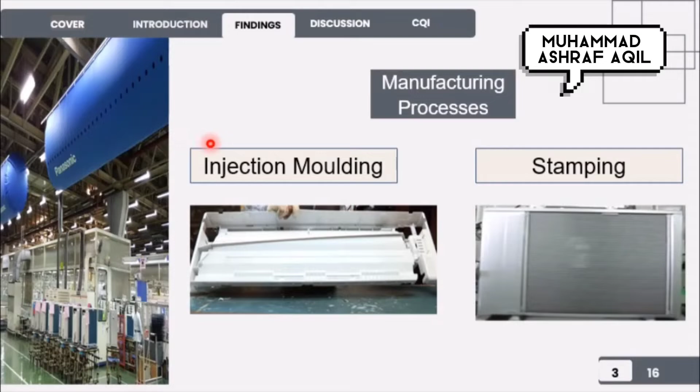Okay, my name is Aqil bin Saisfaizal. Today I'm going to share our findings on how Panasonic manufactures an aircon. There are some manufacturing processes that apply to produce an aircon.

The first process is injection molding. Injection molding is a process of melting plastic pellets that, once malleable enough, are injected at pressure into a mold cavity which fills and solidifies to produce the final product. They use injection molding to produce the housing for the aircon.

The second process they apply is the stamping process. Stamping is the process of forming a flat sheet metal where a tool and die surface forms the metal into a final shape. They use this basically to produce the casing for the fan, which is normally located outside the house.

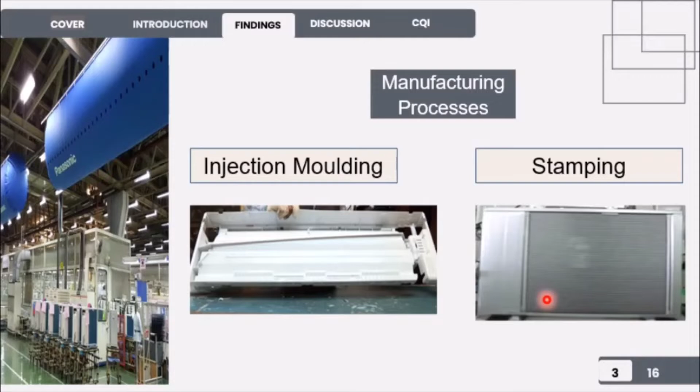Next, the bending process is also included in the manufacturing process. Bending is used to produce a shape with any angle in ductile materials. In Panasonic, they use bending for the sheet metal casing of the outdoor fan unit and the tubing, which is for the condenser and evaporator of the aircon.

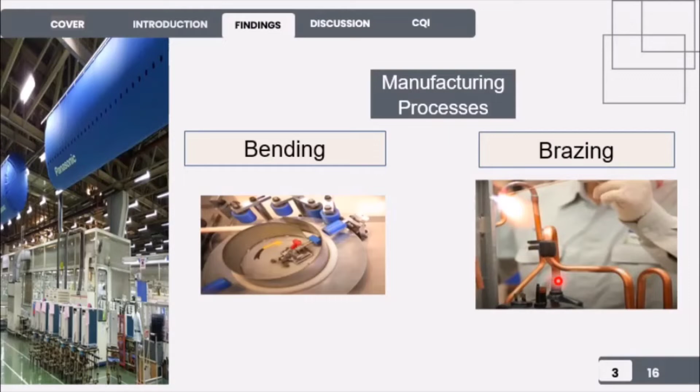Other than that, they use the brazing process to connect the internal parts of an aircon, such as the pipeline, which is made from copper. The final step is the assembly process, where all the parts of an aircon are assembled in the assembly production line in Panasonic.

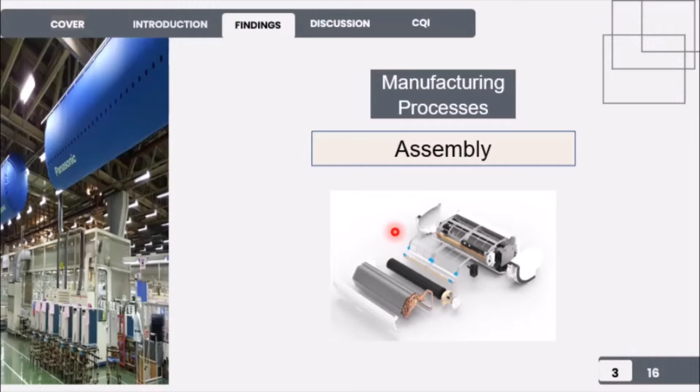Next, there are some technologies or machines provided in Panasonic to ease the process. First, they have a plastic injection molding machine for the injection molding process. Next, they also have a stamping machine to produce the casing of the fan. Then they also have a gigantic bending machine, because they need to bend large parts, as I explained in the manufacturing process.

They also have some technology used to make inspections and quality control, to check whether the product is in good condition. As shown in the figure, they use sound technology to test the sound of the fan.

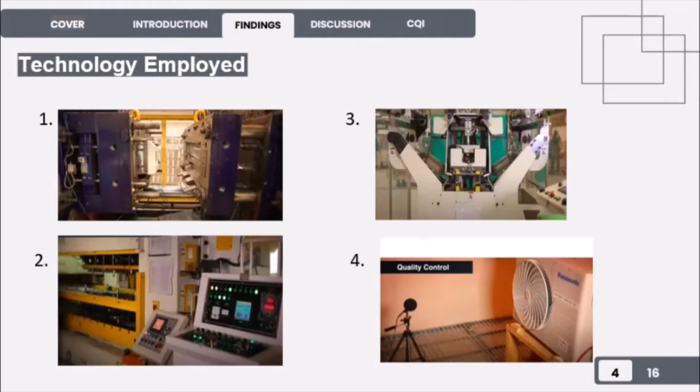Next, I will share about the design concept. As we can see in this figure, these are the normal dimensions that Panasonic uses to manufacture the aircon. All the dimensions are already set before Panasonic starts to manufacture it.

As we can see, the height of the aircon is set at about 184 mm, the length of the aircon is set at about 870 mm, and the thickness from the side view is set at about 204 mm. This figure also includes the dimensions for the internal parts, such as the left piping hole and the right piping hole.

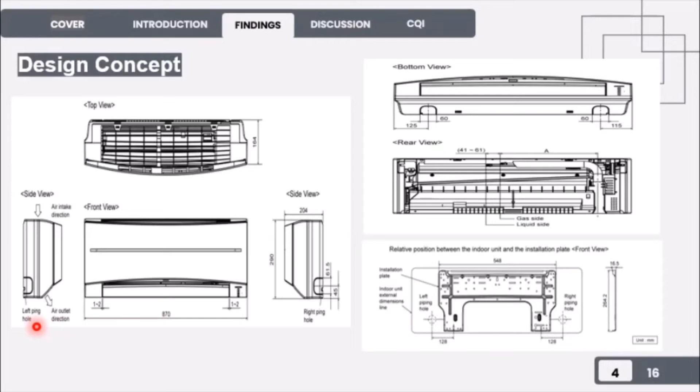Thank you. Assalamualaikum, my name is Muhammad Ahnaf bin Khalid, and I will be presenting the part of the findings on quality assurance, product produced, and problems faced. First up is the quality assurance.

What is quality assurance? It is a process of identifying that the manufactured product meets the standards and is fit to be used. Panasonic Malaysia has a strict guideline that needs to be used on every product they manufacture.

First up is the long-term durability test, in which they conduct an accelerated test for 10,000 hours of continuous operation of its products. This results in determining its reliability for use.

Next is the compressor reliability test. In this test, the compressor that has been used for other testing is disassembled and examined thoroughly to identify any failure and its reliability, as the test functions to determine whether the lubricant is sufficient for the part.

The third is the electromagnetic compatibility test. It is used to make sure that waves produced from the parts do not interrupt other appliances, as it also needs to satisfy the compliance standards set by each country.

Lastly is the waterproof test, which is conducted on the outdoor unit to make sure it can withstand the outdoor environment such as rain, dust, and much more. Here is the video of Panasonic conducting the test.

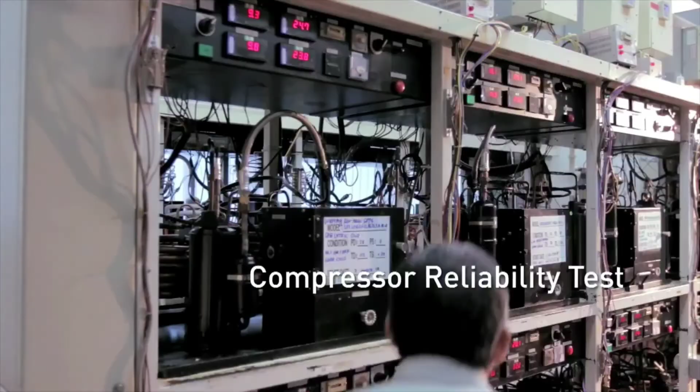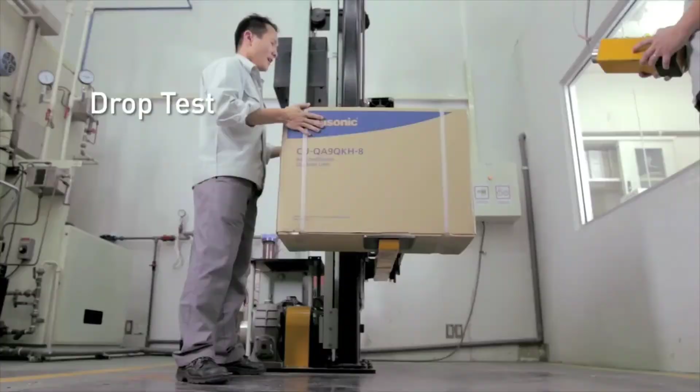Next part is the parts produced. First is the body casing for the indoor unit, produced using the injection molding machine. Second is the pipes connected to the radiator using a brazing joint. Third is the outdoor unit, whose casing is made by the stamping process. Fourth is the heat exchanger part, produced using stamping and brazing. Finally, number five is the pipe used to transfer heat from the indoor unit to the outdoor unit, which uses the bending process.

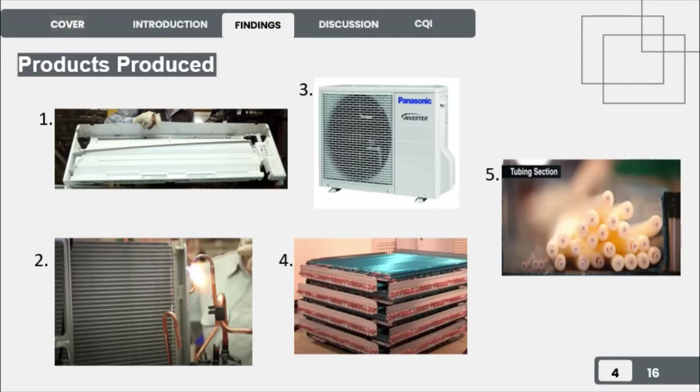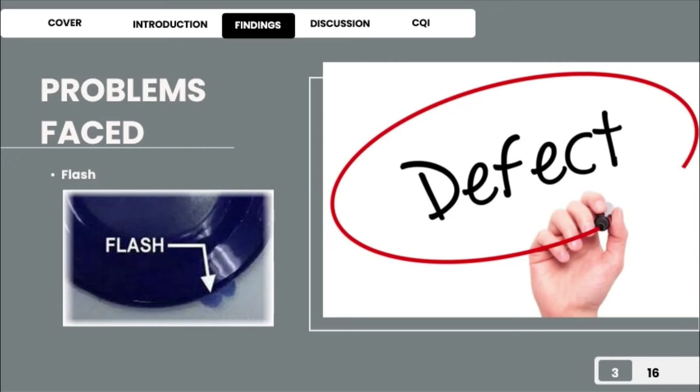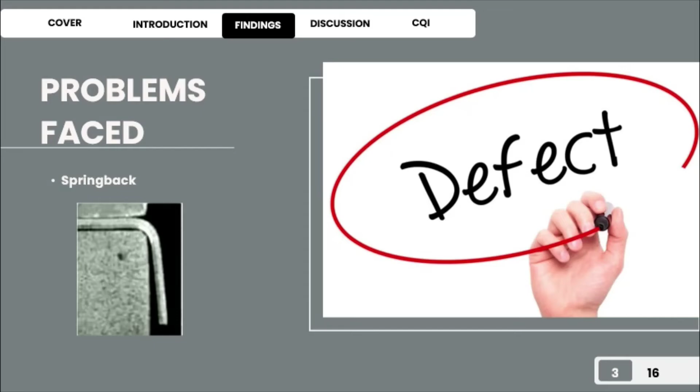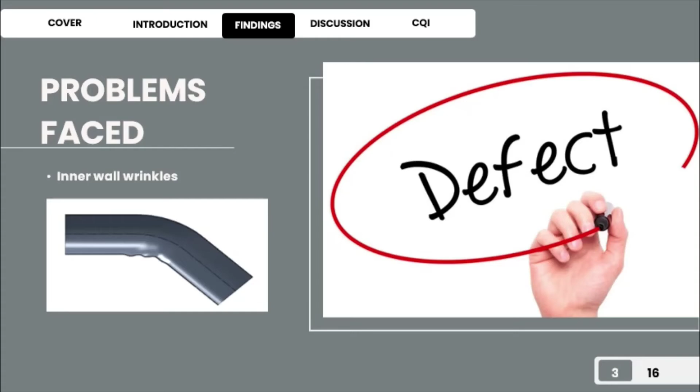Next is the problems faced. For this product, there are a few defects that may occur in the manufacturing process. First is flash, which occurs during injection molding, where molten plastic escapes from the mold cavity. Next is flux entrapment, which usually happens in the brazing process, when a bubble of flux gets stuck in the brazing joint, creating a weak joint and leakage. The third is spring back, usually from the stamping process, which happens when the elastic region of the metal is strained but relaxes following its elastic characteristics. And the last is inner wall wrinkles, which usually happen during bending and form due to pressing force.

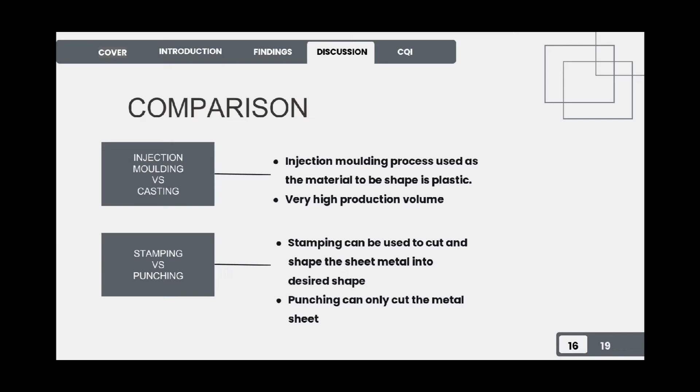Next is how to overcome defects. First is flash. To overcome flash, increase the clamp pressure to ensure the mold parts remain shut during shots. Next, ensure the mold is properly maintained and cleaned, or replaced when it has reached the end of its useful lifespan. Lastly, adopt optimal molding conditions like injection speed, injection pressure, mold temperature, and proper gas venting.

Next defect is flux entrapment. Make sure the gap of the part to be attached is suitable for the flux to function properly, and ensure the part to be attached is heated up, balanced if the thickness of the part is different.

Next defect is spring back. To solve spring back, multiple strategies may be required. The most common method is to overbend or compensate the forming tool shape to account for the spring back defect. However, this method alone may not be successful, and sometimes more effective methods are required, such as inducing positive stretching to increase the part strength, making the product stiffer and stronger than the original material.

Lastly is wrinkles. Wrinkles can often be solved by stretching or drawing the material instead of forming or crushing without any pads restraining the flat sheet. However, for more complex 3D shapes, draw pads may be required in addition to initiate maximum stretch in the material and prevent it from wrinkling.